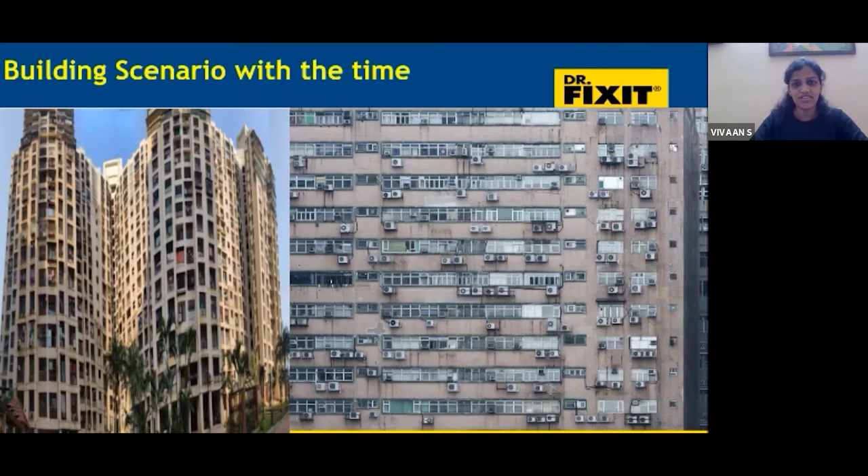At the initial, new stage, buildings look beautiful, but during the service stage of life, the building scenario changes with time. We can see this from views of buildings, both external and internal - fixing of mechanical units, peeling of paint or discoloration from the external side, as well as dullness of paint, blistering, and dampness inside the building structures. So why does this happen?

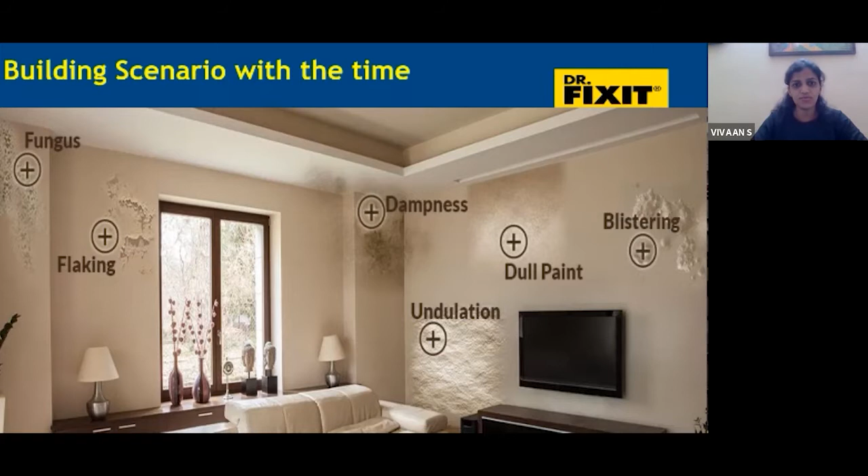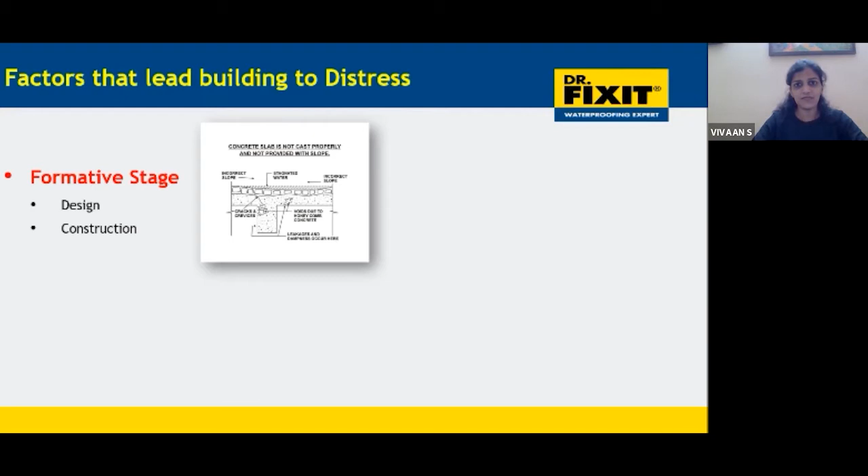These main problems arise from water or moisture ingress inside the building. These are some of the factors which lead to distresses - one is at the formative stage itself, while designing the structural and architectural design of the project, and one is during the construction phase of the structures.

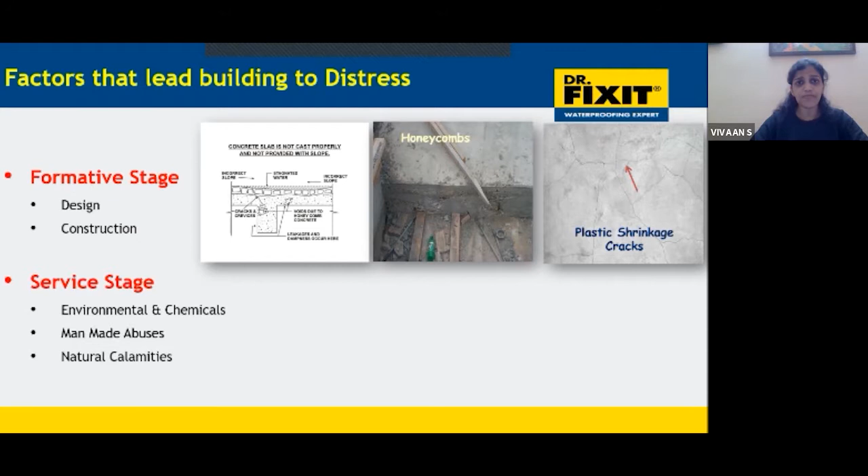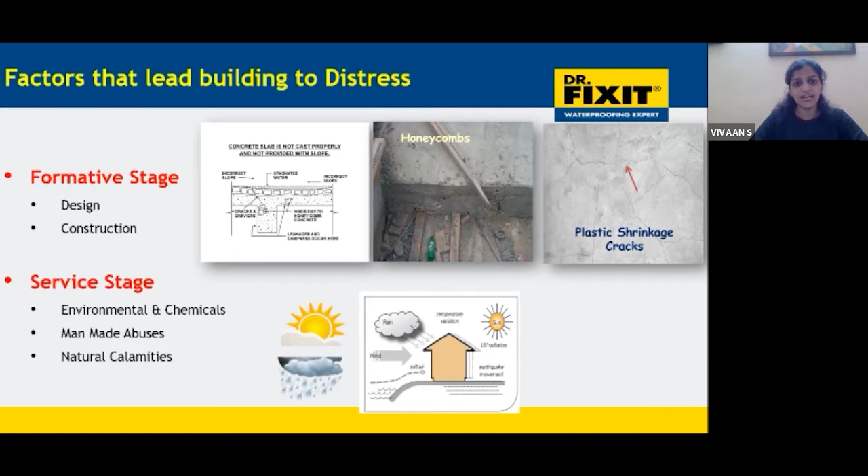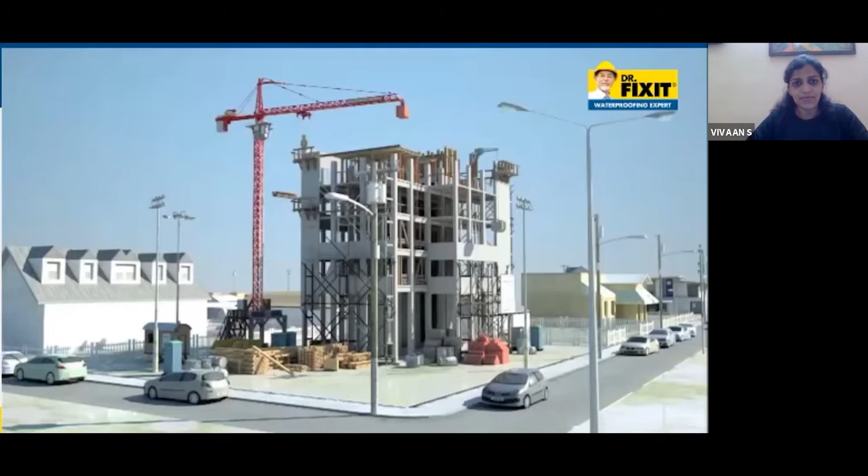At the time of concreting, there are some kinds of voids formation or crack formations in concrete practices. Similarly, during the service life of the structure, it also leads to formation of issues due to environmental conditions - our rain cycle, winter cycle, and summer cycle. Monsoon changes or seasonal changes also affect building services. Similarly, there are man-made changes to building structures as well as natural calamities, earthquakes, and floods. So let's see how waterproofing is required for building structures to give proper protection.

I'll just show you a small video. Still, we do waterproofing as a conventional practice, and some of these practices are also leading to leakage and dampness problems. I'll just show you a small AV in front of you.

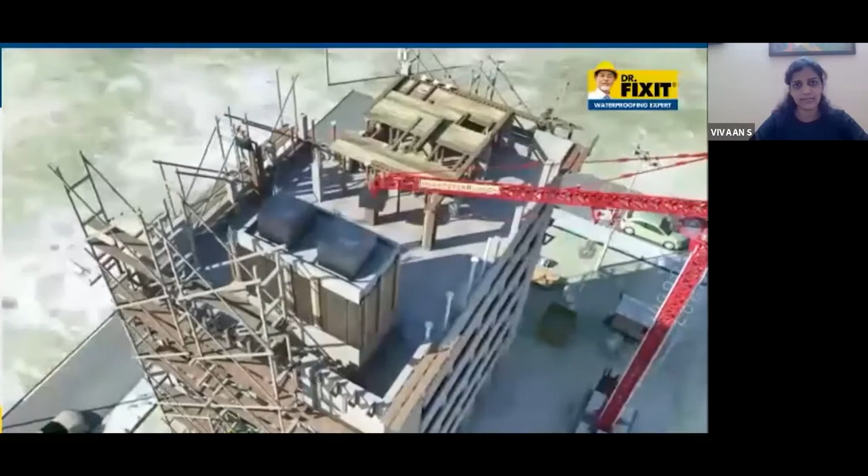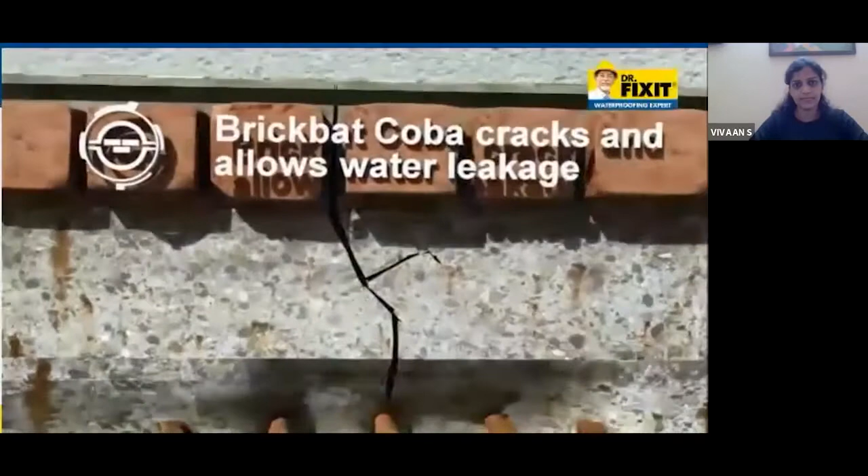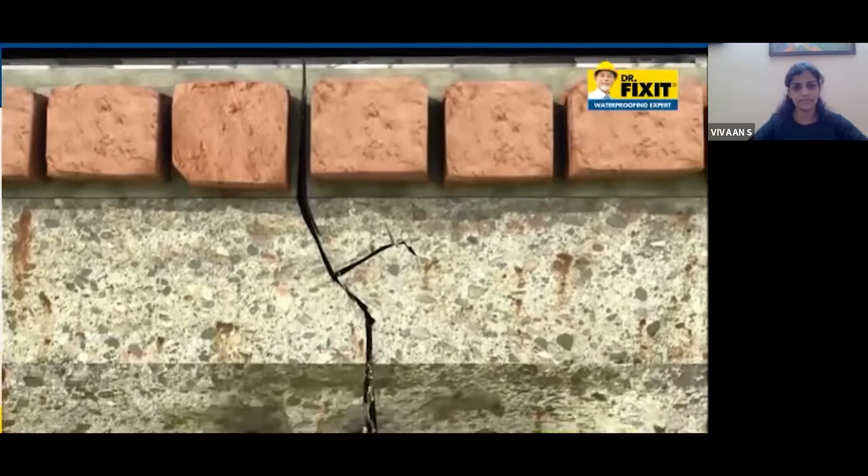It takes years of design and planning to construct a strong building. Unfortunately, not much has changed about waterproofing. Conventional methods like brick-bat coba and China mosaic are often considered sufficient, but weather can be unforgiving. Rapidly changing weather and temperatures throughout the day put a lot of stress on the building. This harsh weather adversely impacts the concrete structure and weakens the building. Water can be an extremely destructive force. It can slip through the tiniest cracks, cutting its way through every crevice it can find, percolating through the concrete and destroying everything in its path. And when it enters a house, it damages the ceiling, walls, floors, and interiors.

But it is possible to stop all this damage from happening. Dr. Fixit has a range of waterproofing solutions to completely protect your building from this devastation. We have also introduced on-site training programs for applicators, which help in maintaining superior and consistent quality of work, a mobile app to provide instant information on the go, and a website with an array of information on waterproofing for new construction as well as repair. The website also has a live chat to solve all waterproofing related queries. This is to all my builder and architect friends - you have created structures in your cities and built a reputation through years of hard work. Today, Dr. Fixit is committing itself to partner with you in making sure that your creations pass the test of time and become the benchmark for future generations.

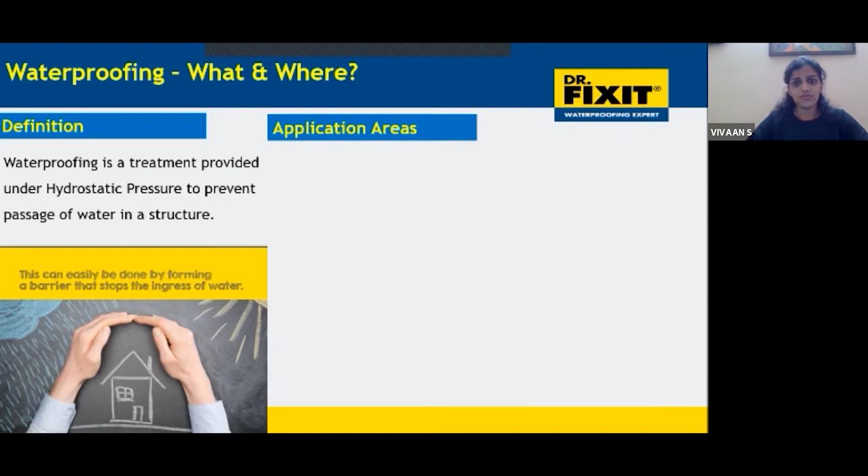So water is the main constructive as well as destructive force inside our building structures. It's a main element required for construction as well as for destruction purposes. So to protect from moisture ingress, we need to do this waterproofing, and treatment has to be given to building structures to protect against water ingress under hydrostatic pressure. The waterproofing systems should be applied from the substructural elements to the superstructural elements, covering all surface areas of the building.

Now let's see how to do this, the waterproofing. The waterproofing has two categories. One is integral waterproofing and the second one is layer waterproofing. These two categories are most important.

One is at the time of making your building structures, that is the concrete mass. The integral waterproofing compound has to be used at the time of making the concrete, mortar or plaster material, and these are mixed with the cement content itself. This reduces shrinkage crack formations during concrete practices and also increases the strength of the structures. So this is the main part of making a strong concrete.

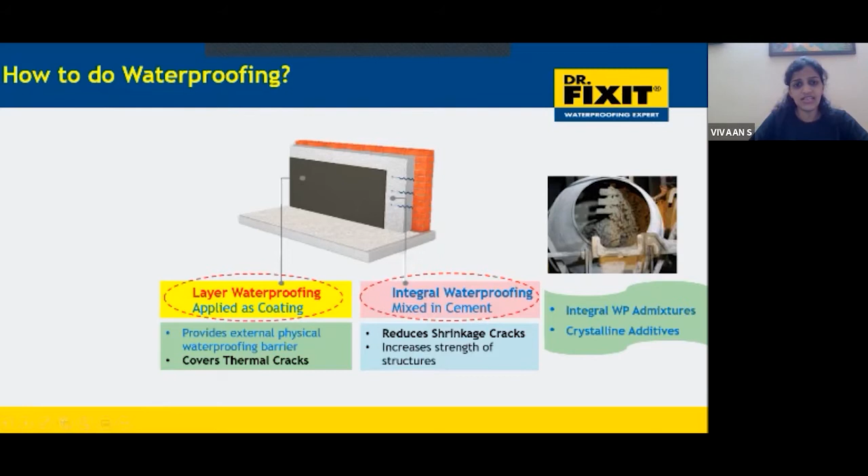The second one is to protect your concrete structure throughout the service life, or to protect the structure from environmental conditions. We need to provide a jacket or protective layer in the form of a layer waterproofing system. This has to be applied in the form of coating, preformed membrane applications, and there are some joints in the buildings that have to be sealed properly.

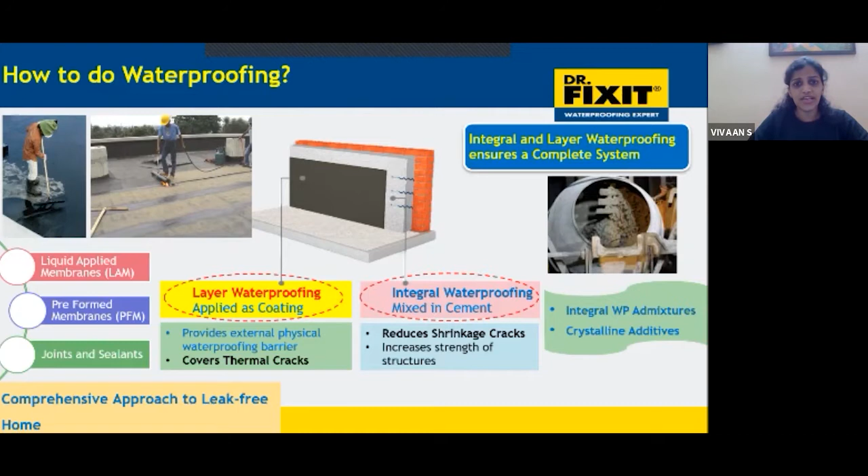So these are the three major categories under layer waterproofing systems, which provide an external physical waterproofing barrier, and also cover thermal crack formations inside the concrete mass. This layer and integral waterproofing compound ensures a complete waterproofing system. To achieve a building envelope and long service life of building structures, we should follow good construction practices as well as effective waterproofing system applications, which gives leak-free structures.

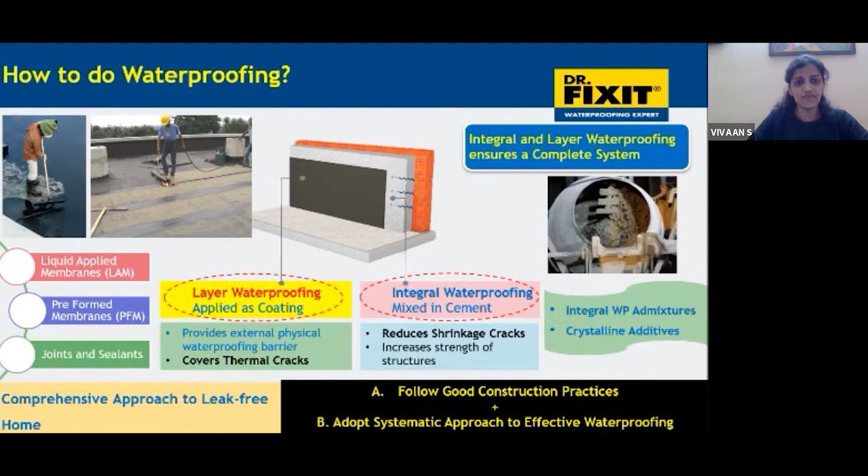So these are the waterproofing principles and facts related to this. When we consider the life cycle analysis of the structure, there's a principle called the 80-2 principle. The 2 stands for 2%, the total waterproofing material cost of your total project cost. That much is required at the initial stage itself. But if we do not consider this at the initial stage, it leads to an 80% cost for repairs of the project during the service span of the building.

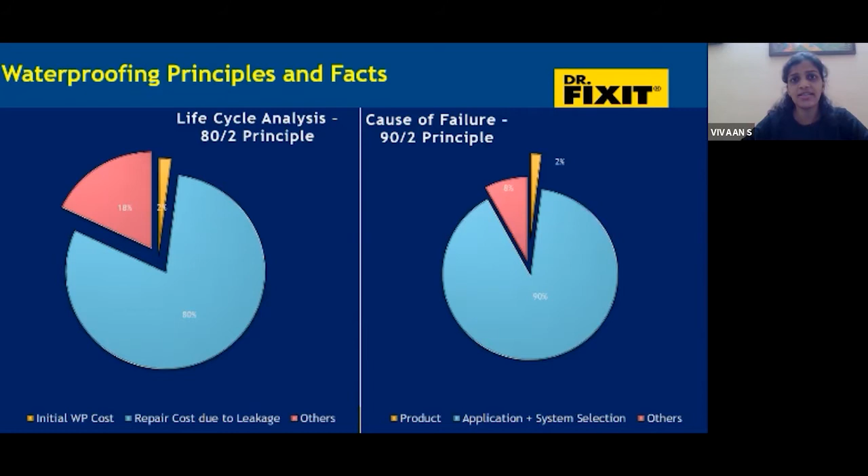And 18% is related to other factors. Similarly, as a life cycle analysis, we should also have a failure analysis of waterproofing systems, which has a principle of 90-2. Again, the 2% remains for your waterproofing system material selection, and 90% is for the application of these materials. So this part is important, both the material selection and their application, and 8% is for other factors. This gives you the total idea about waterproofing practices, their principles, and the life cycle and cost analysis of the project itself.

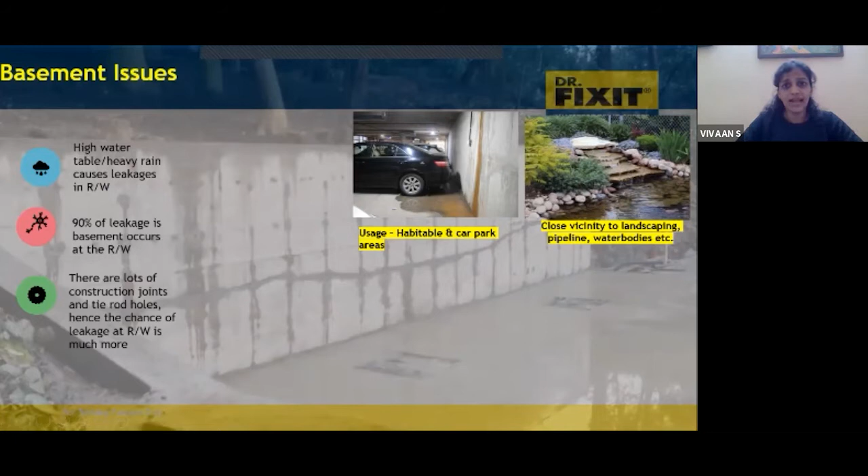Now let's see about the waterproofing of building structures. The building's main foundation is the basement. Basements used for car parking areas often face leakage issues. Water comes from construction joints or the concrete mass itself, from nearby landscaping, pipelines, or water bodies near the project site, increasing the risk at basement levels. Contaminated soil content also leads to basement leakages and dampness problems inside buildings.

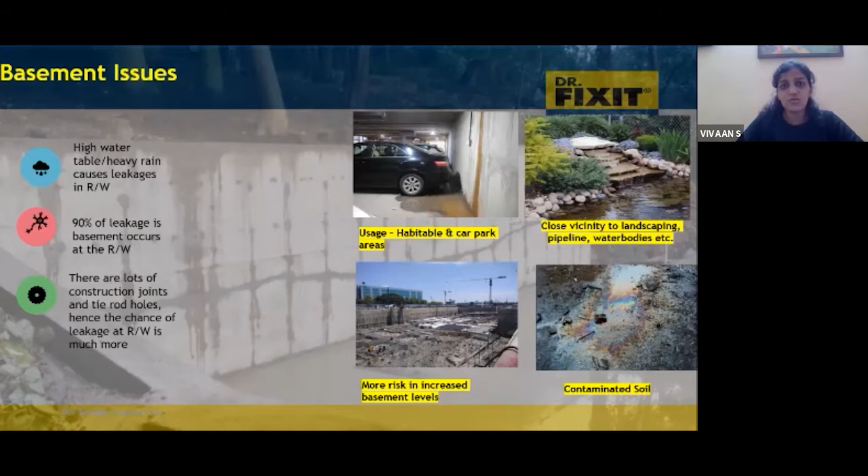To protect the basement structures, proper waterproofing should be done at the design stage with proper system selection. First we need to understand the purpose of the basement - what is its grade of usage? Are we going to use it for car parking, storage, or plant rooms? Depending on this grade usage and the nearby soil condition and water table, it has to be divided into three categories.

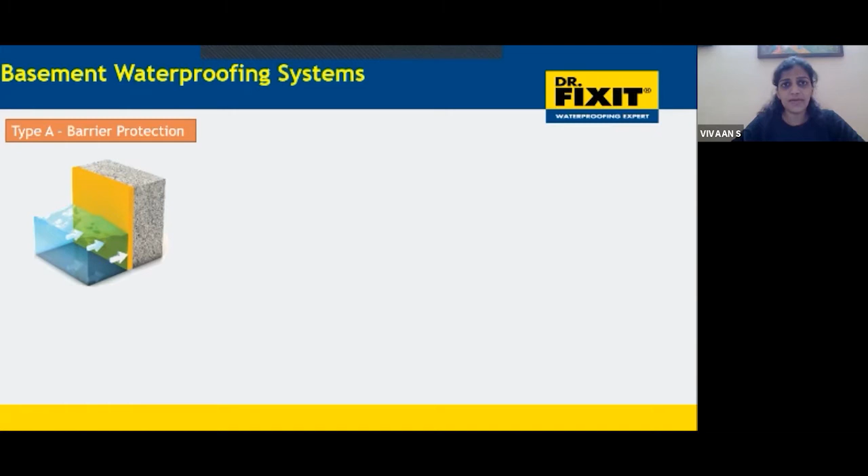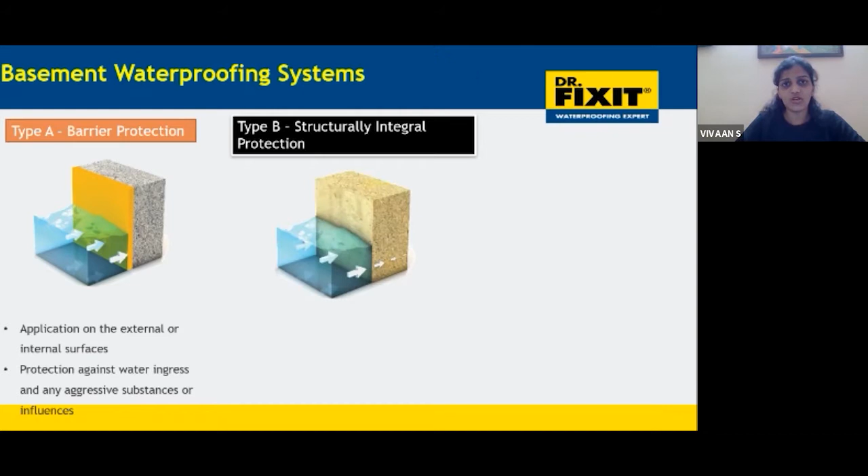The first system is called Type A, barrier protection system. In this waterproofing system, the material has to be applied either from the external or internal side of the concrete mass. The second category is called structurally integral protection - this is to make the concrete itself waterproof by adding integral waterproofing compounds at the time of making the concrete.

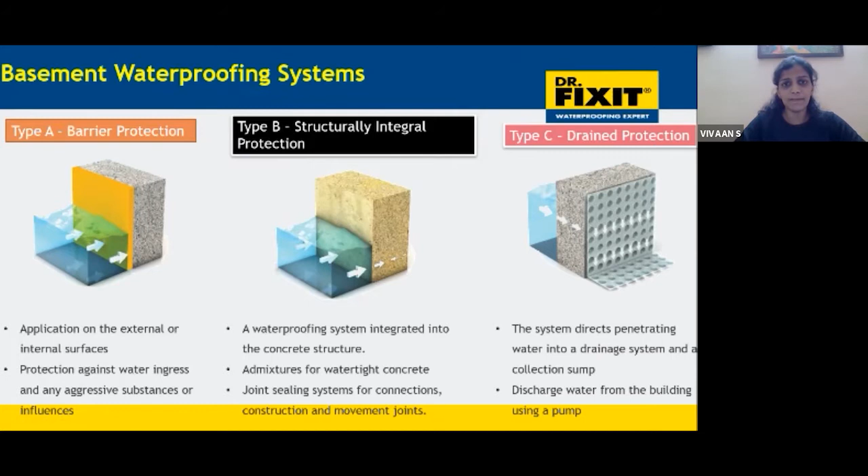The third category is drained protection. Here we provide drainage boards inside the basement from the internal side, so that water will percolate and be stored at the drainage board, then collected from a sump at one location on the project site. Depending on the basement grade usage and water table conditions, these three categories can be combined or used singly on projects.

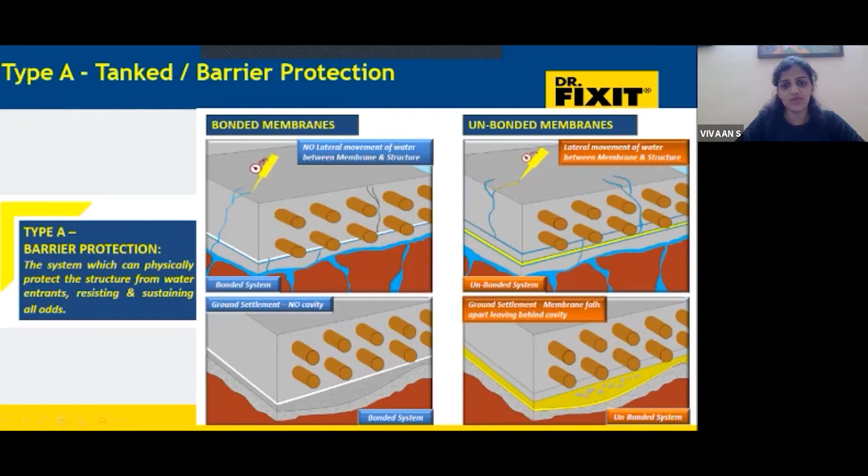Now let's see what is meant by barrier protection. This is where we provide a waterproofing membrane before the concrete laying, so that the concrete mass sticks to the waterproofing membrane, leading to a bonded system. In an unbonded system, the waterproofing membrane does not adhere to the concrete substrate. The important part of bonded membranes is that during soil settlement, the membrane sticks to the concrete mass and cracks or water percolation will not form in the raft or concrete surface.

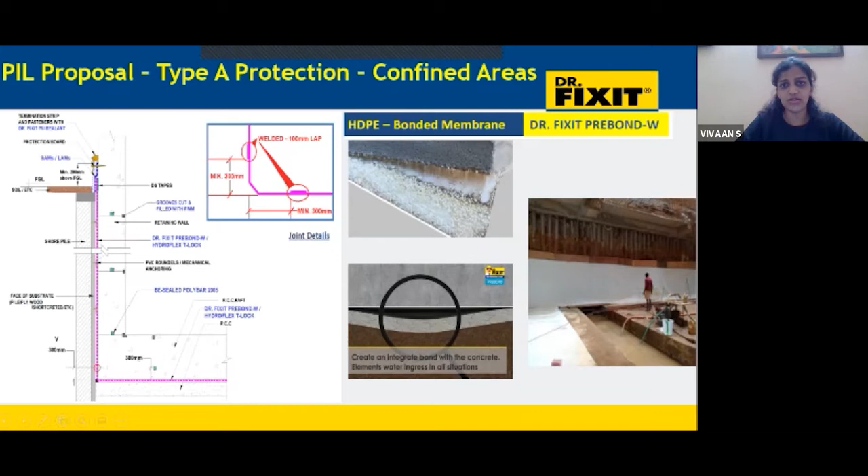The second system is for unconfined areas, where you have access from the other side of the retaining wall. There you can go for liquid applied waterproofing membranes. Some of the main important properties here are good tensile and elongation properties, and good adhesion with the substrate mass.

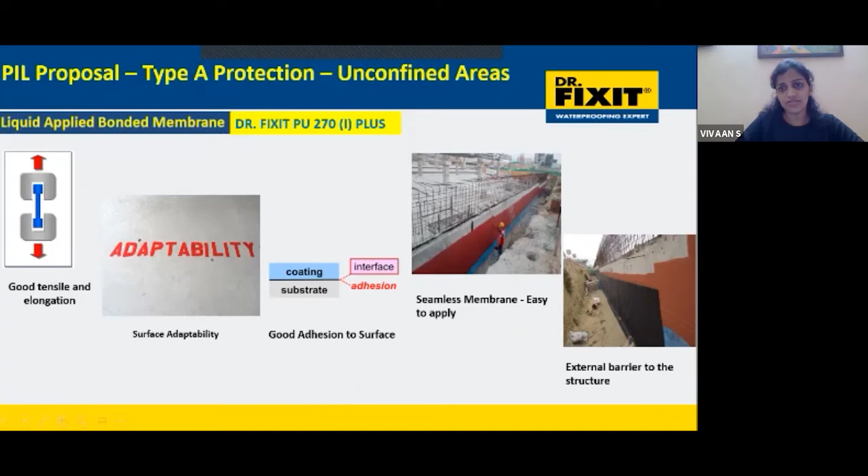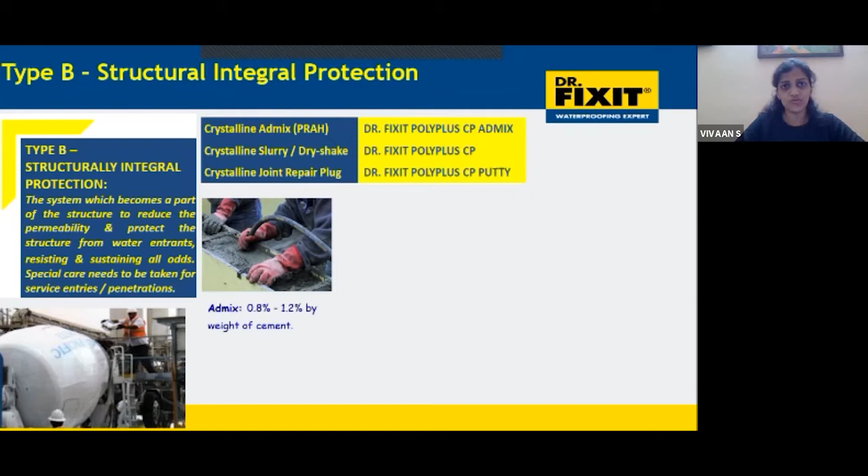The second type is structural integral protection. As defined, this makes the concrete itself waterproof. This has been widely used as a crystalline system material in the form of admixture, dry shake, or as a coating on the concrete surface.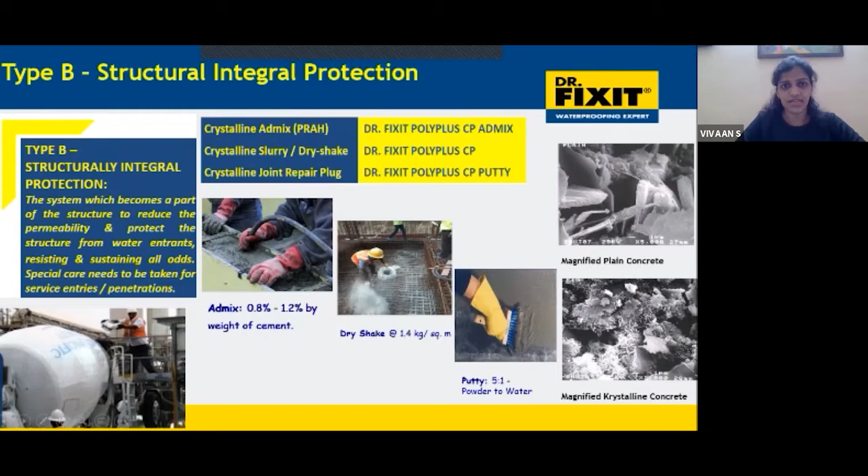Let's see about this podium waterproofing. As podium itself is a big subject, we are going to use this as we are having various utilities over here as per their associated problems.

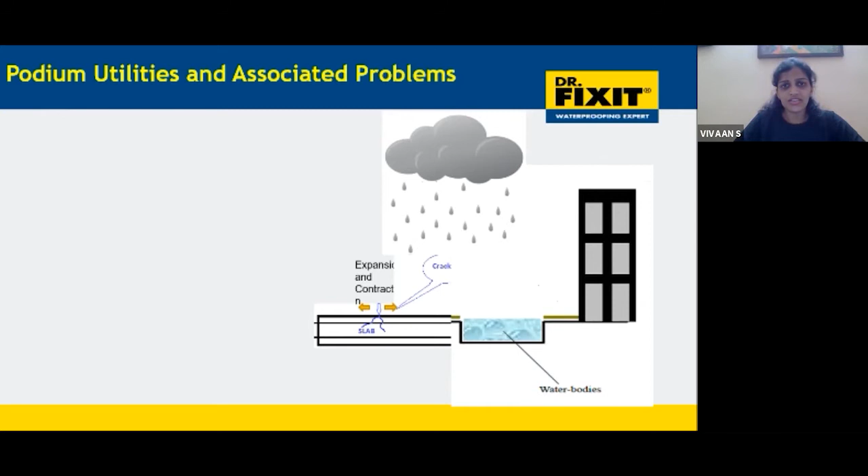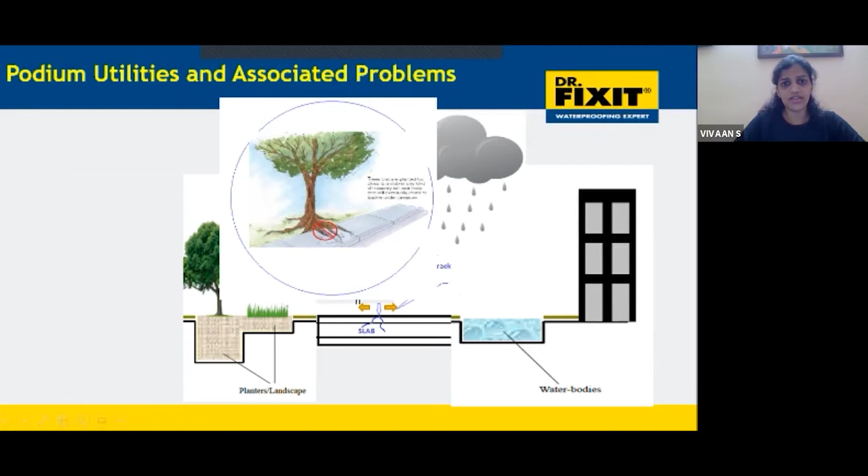So we use the podium substrate where you are having various loading parts, and due to expansion and contraction, concrete slab gets crack formations. These are having other utilities like water bodies and planter boxes. During the planter boxes or landscape, plant roots also penetrate inside this concrete mass. We also use this as a hardscape for car parking areas. So these are the utilities.

To cover all these utility points, the system has to address all these utilities at one go and their problems at the initial stage itself. So to define a system for the hardscape, the waterproofing membrane has to take care of all good tensile properties, adhesion properties, and elongation properties to handle all these thermal stresses.

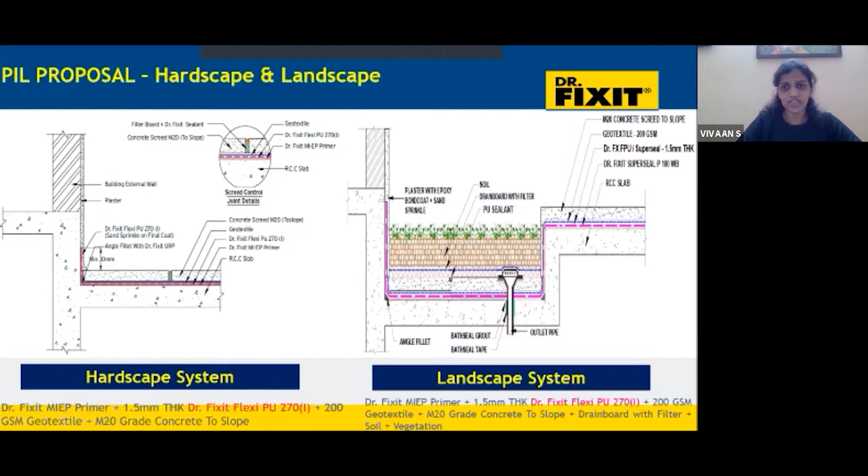This concrete membrane gets covered with a protection screed along with control joints. If you are providing the landscape or planter box system, they are going to add a waterproofing membrane below the soil mass, with proper positioning and fixing of the features. With drainage pipes and drain boards, soil mass and vegetation growth will come up. So this waterproofing material should have antiroot properties, so that plant roots will not penetrate the waterproofing membrane.

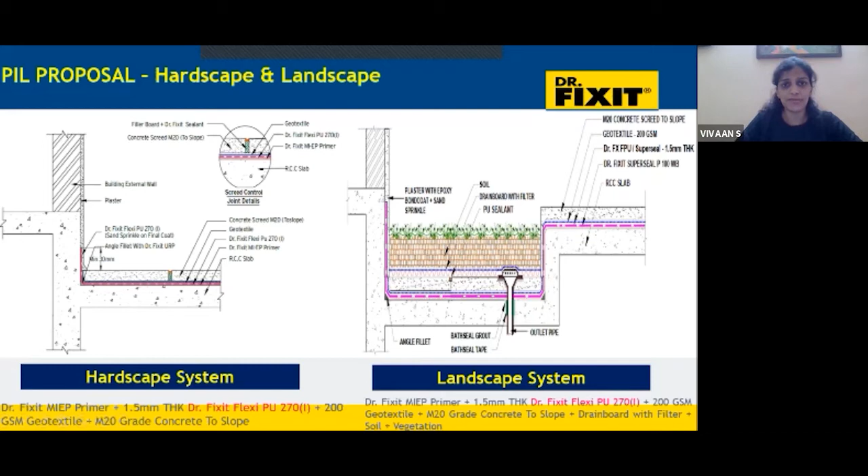This is a simple application process which starts from surface cleaning. Then if they are having cracks, we have to repair the cracks. At the wall-floor junctions, we have to provide angle fillets. If we are having various upstands and pipe penetrations, then the water outlets have to be detailed properly at the time of application itself.

The application of the waterproofing membrane is either in the form of coating, spray, or squeegee pad applications. Once the coating is ready, we have to go for a ponding test to check that water is not leaking from any substrate or from the coating itself. Then the coating is covered with geotextile and concrete screed. The concrete screed has to be laid in the form of a slope towards the drain outlet.

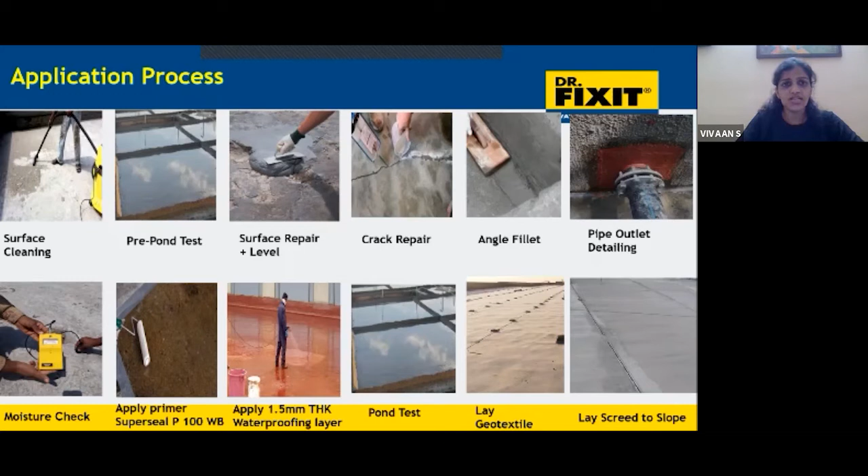Next, let's come to roofs and terrace waterproofing surface areas. Conventionally, we use a brickbat cover system. But this brickbat cover has lots of associated problems. So nowadays we have new technologies where instead of brickbat cover, we can use a foam system.

A PU foam kind of material has come up, which has to be spread, and within a fraction of a second it gets foam formation and gives you the density of bricks itself. This will work as insulation and then waterproofing properties. Then we have to cover this with a waterproofing coating, and then geotextile and screed formation.

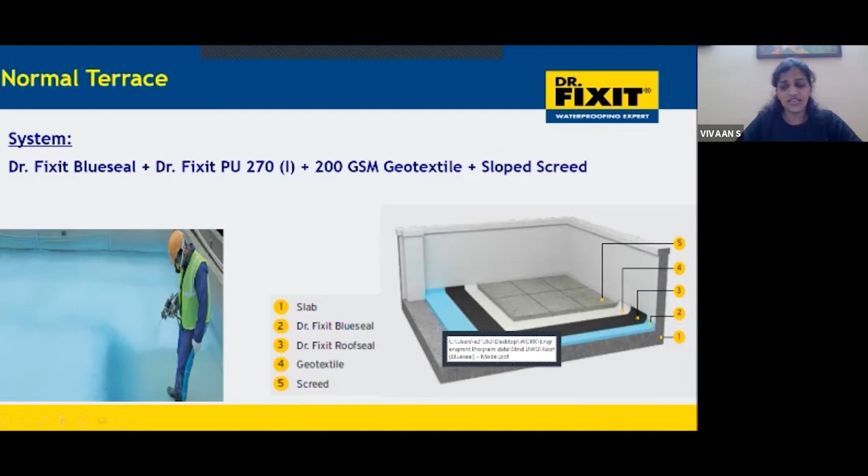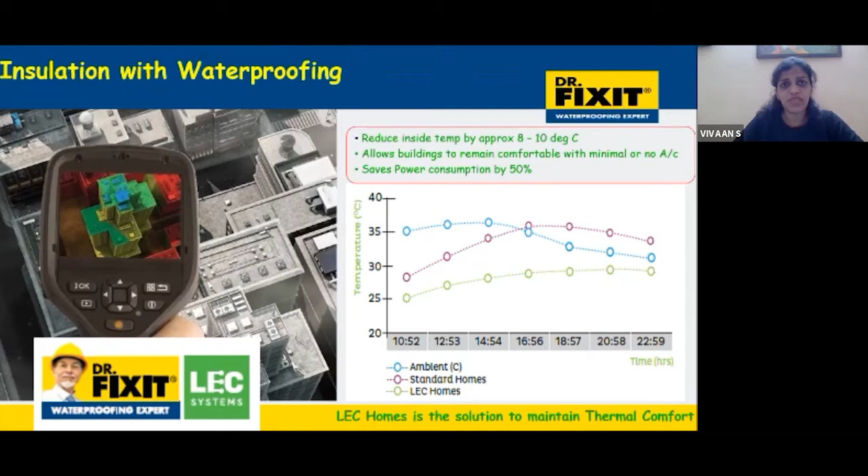Coming to green buildings and sustainable buildings, we also have green ratings. To derive this, we need to do insulation along with waterproofing systems, so that both purposes are achieved through this dual system. We should apply a low energy conservation system. To optimize this, we first need to understand the U value and R value of the buildings and surroundings.

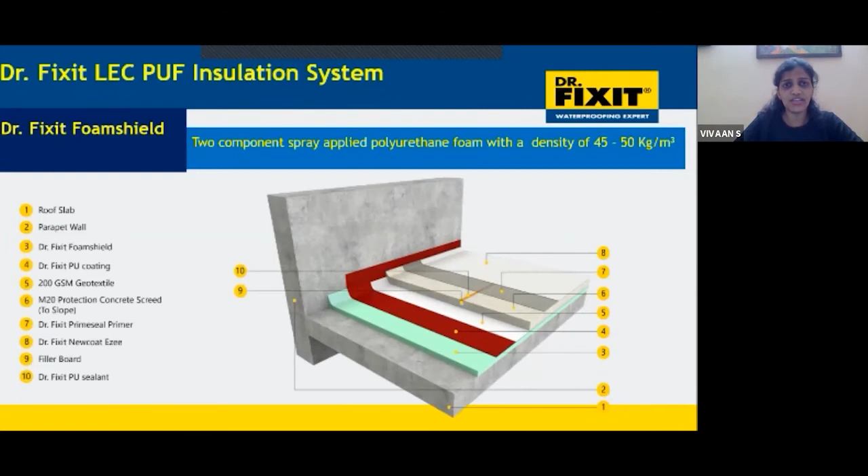On that basis, we are going to provide PUF formation or foam formations to minimize temperatures by 8 to 10 degrees Celsius, which works as insulation. Then again we cover it with waterproofing systems along with proper application methodologies. So this is the overall system we apply to get insulation and waterproofing systems.